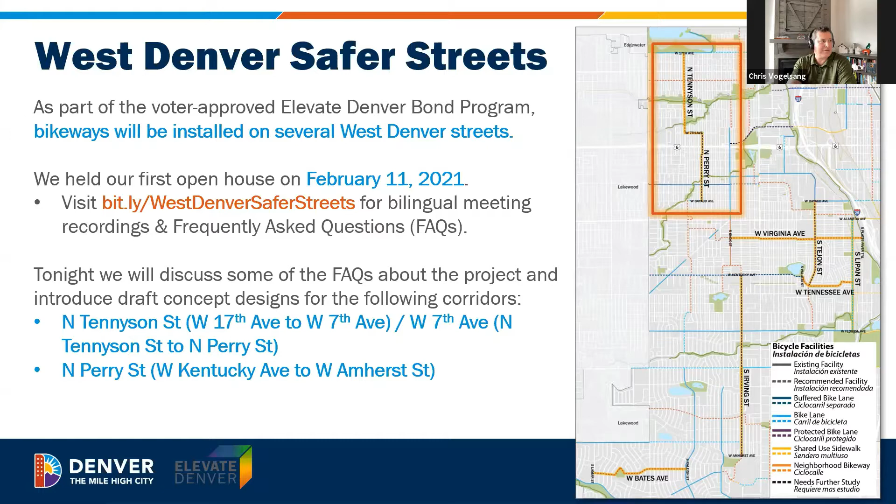We had an open house February 11th. I know some of you were able to attend, and we gave high level information at that point, but now we want to dig into the nitty gritty.

Our schedule for this effort: we had our first open house on February 11th to kick off the project. Since then, we've done a lot of gathering information and talking with schools and registered neighborhood organizations as much as possible, and gathering physical data to help us develop initial concept designs. Concept designs are how we put our ideas onto paper so people can see for themselves what is being proposed and give us good feedback.

After this meeting tonight, we'll have our input windows open for about 3 to 4 weeks, through mid-April, and we'll go through in detail how to give us specific feedback that I know is really important for everyone here. After that time, we would move a concept into design and then into implementation. Right now, our installation timeframe for what we decide on for our design would be in 2022 or 2023. So not that far down the road.

Which is very fast in DOTI's world, like next year.

To give you a sense of what we're going to talk about tonight, this is a high-level agenda. First, we'll do a quick poll question and give you the tools you need to see the concept designs for yourself and give us feedback — that's a very important part of tonight's meeting. Then we're going to go through the concept designs in 2 pieces: the North Perry Street piece, which is right now a protected bike lane type of installation, and then the Tennyson 7th piece, which is a neighborhood bikeway. Then we'll talk about next steps on how to stay engaged.

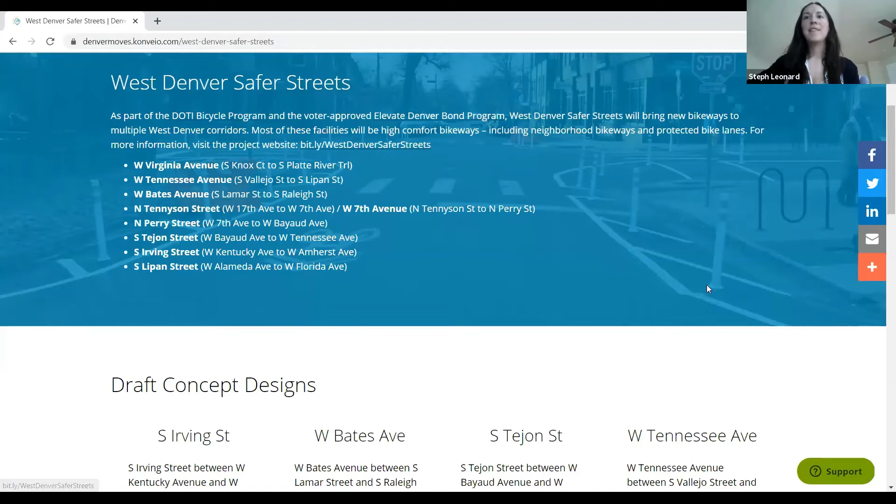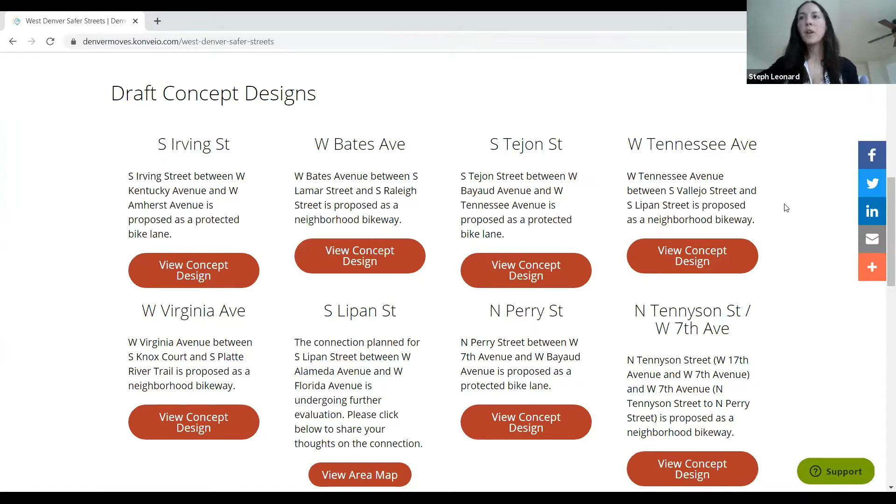We know what people are interested in, so we wanted to make sure the draft concept designs were up close towards the top of the page. I'll go ahead and keep scrolling through the page, and then we'll view a concept design as well. On this main landing page, we also have content from our first public meeting, which was on February 11th.

That was the kickoff meeting for the entire project, if you weren't able to attend. We have recordings in English and Spanish, as well as a frequently asked questions document that we are sharing in the chat.

I'll scroll back up and choose Perry Street. When you click on that, you get more content about the specific corridor. Perry Street is proposed as a protected bike lane.

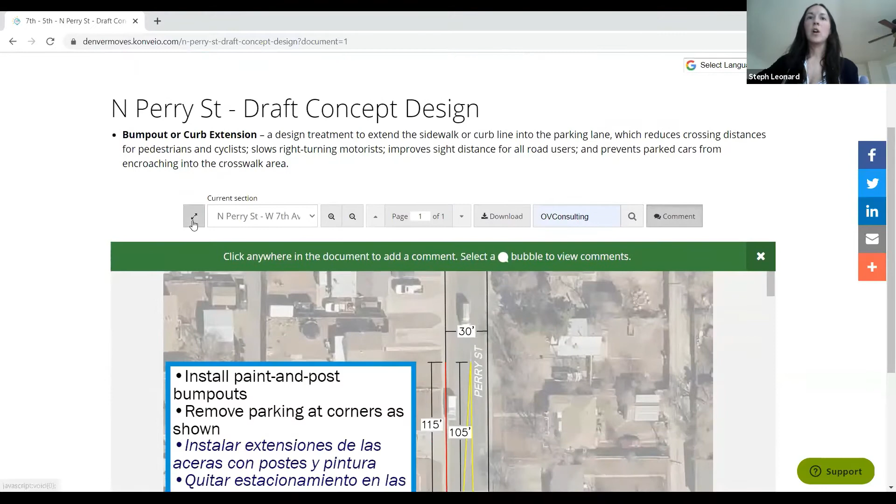We describe what a protected bike lane is, then go directly into the draft concept design, with instructions on how to use it. You can choose a language to interpret or have the page translated into, so if English isn't your preferred language, you can change that up here. If you're viewing from a mobile device, we've gotten feedback that it's a little hard to view the concept embedded in the page, so you can click View Draft Concept Design to see it larger, with a feature to expand it even wider.

That's if you're viewing from a mobile device—we recommend clicking this red button. I'll walk you through how the site is laid out. The corridors are rather long, so to improve viewing we've separated them into different sections so you can choose which one you're looking for. We cover everything, though sometimes references might seem a little off so we can call the closest cross street. Here we are on West 7th Avenue to West 5th Avenue, so you can choose between corridors here.

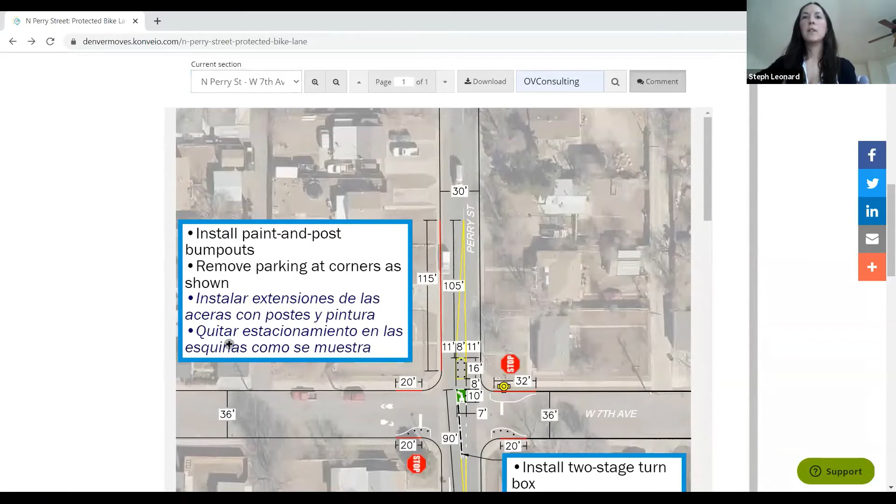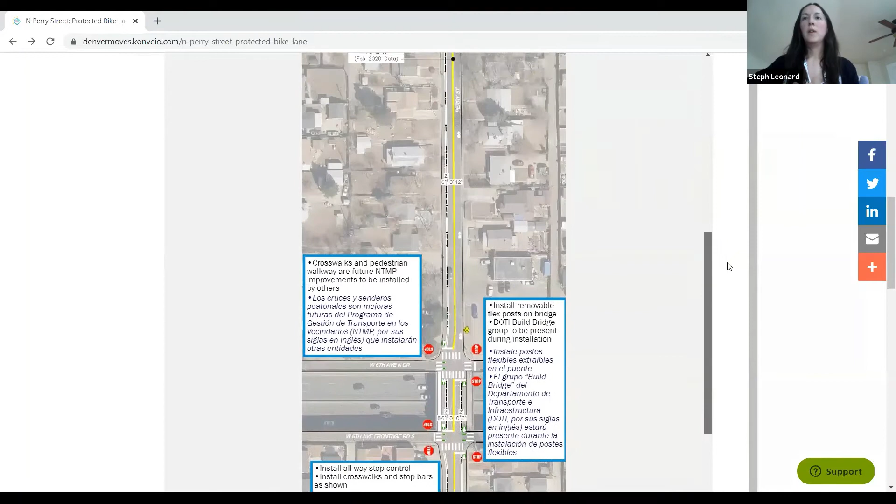Or you can scroll down and choose next to seamlessly move between different sections of the corridor. Right now it's zoomed in to cover the full area, but if you want a broader picture of how this segment will work, you can zoom out and see the flow of the corridor. We've translated all of the content into Spanish on our concepts.

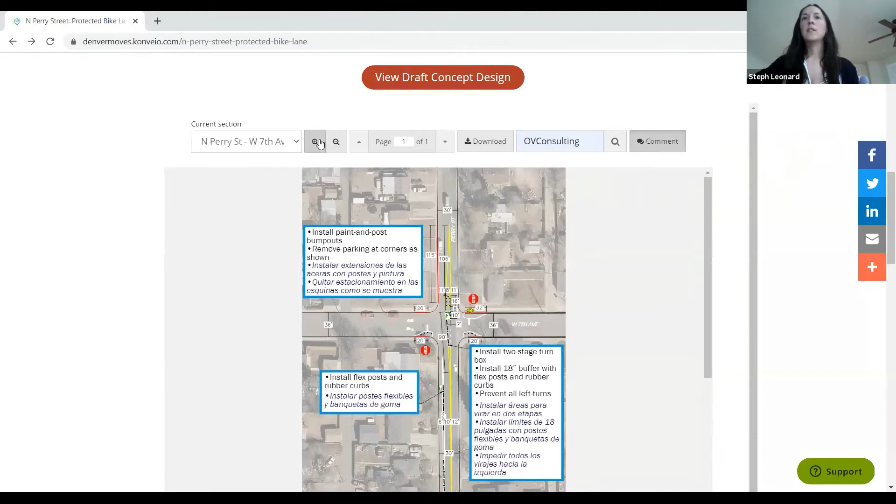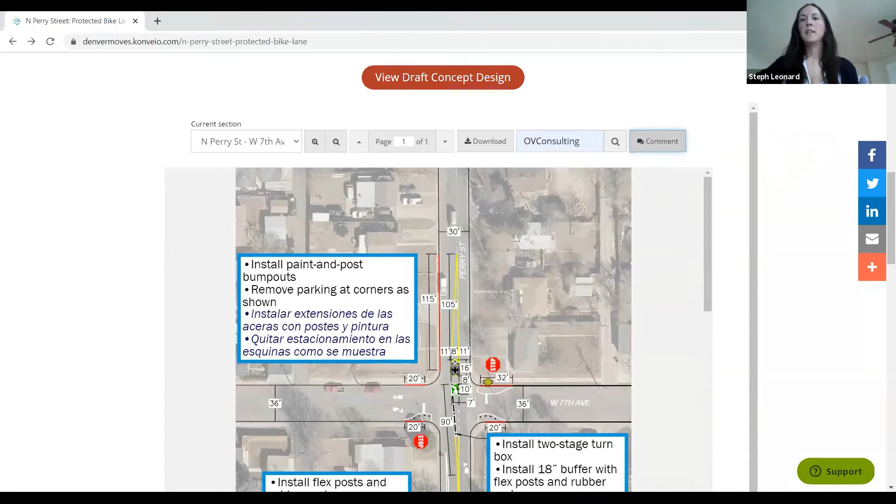The wonderful thing about this tool is it allows for open comment. You click on comment, then you'll get this little plus sign—say you want to comment on this median island here. This is the pop-up that shows up.

We recommend typing in your name so we know who the feedback is from. You can leave your email, though it's not required—email is especially helpful if you have a specific question, so we can follow up with you directly. Then you'll put your comment in, agree to the terms and conditions, and it helps us to know if you're classifying your comment as a suggestion or a question. Then you'll have to prove you're not a robot with the reCAPTCHA before you leave a comment.

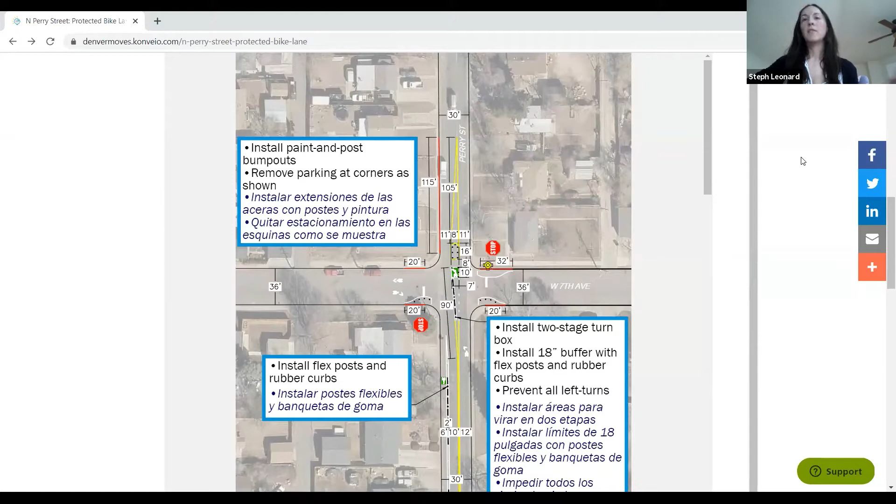What's nice is—and I'll show you on another corridor that already has more comments—this tool also allows you to view everyone else's comments and interact with other commenters. You can respond directly to comments that other community members have left, and there's also a like and dislike option.

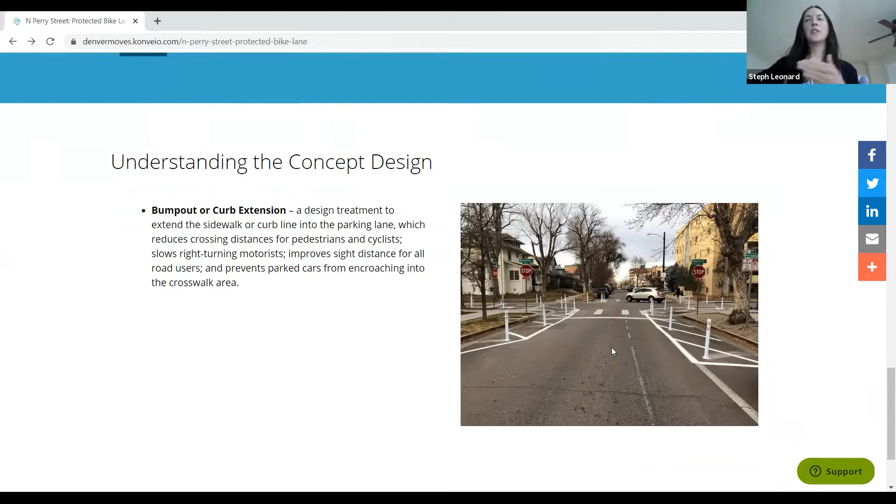Before I show you that, I want to finish out this page. If you have a general comment about the corridor—maybe about the entire span of the Perry Street corridor and not a specific section—we recommend you leave it here. We also tried to include a few design components so that when you're reading through the concept design, you can understand what that would actually look like. We've tailored them to the specific concept designs, but if something isn't showing up, the neighborhood bikeways tend to have even more features, so that's probably your best bet for finding that content.

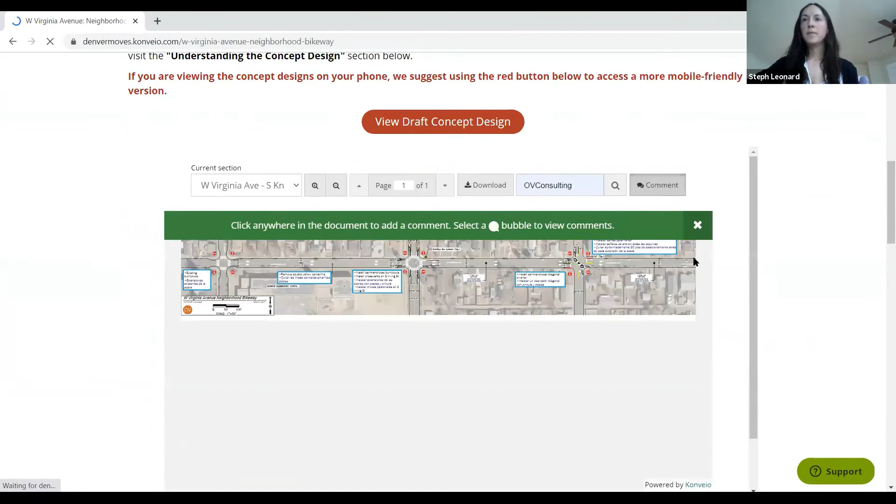I want to show you a nice feature. Say you wanted to leave comments on multiple corridors, you can just find this drop down here and switch between different ones. I'll choose a neighborhood bikeway that already has some comments on it—here's our Virginia concept design. Maybe there aren't comments on this yet, so we'll choose one I know has comments. Let's go to Irving.

Irving was our first meeting.

Takes just a second, especially with the Zoom going.

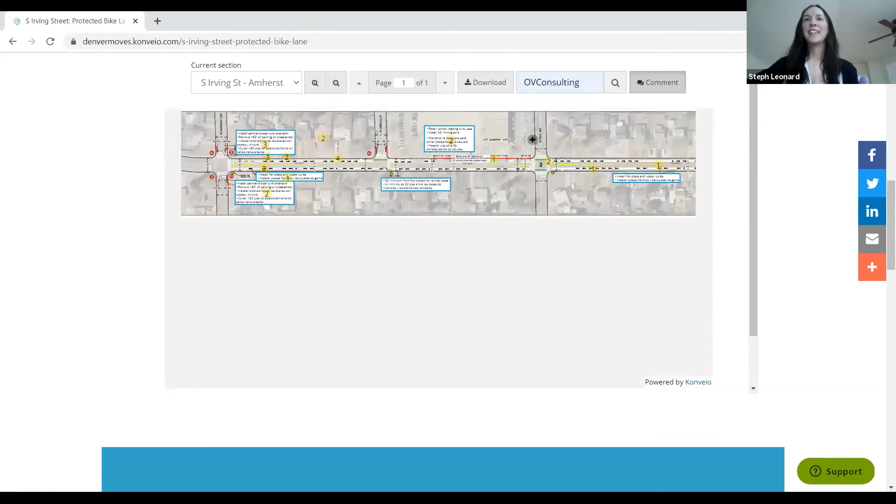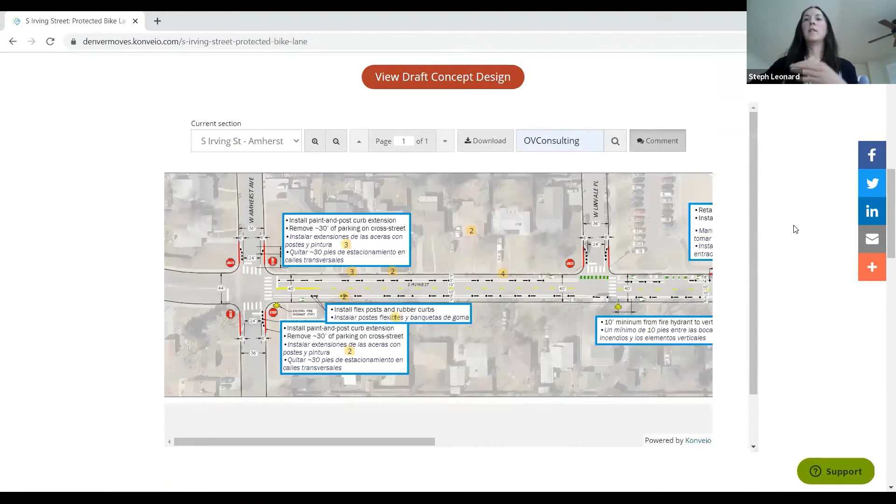So you see these new features. We have these yellow dots that show you all the different comments we've received so far. There's a general comment, and then people have liked and disliked, and then responded as well. That's nice so we can compare how different community members feel about the same thing. Maybe there's a lot of support for one particular comment, and we're hoping to provide an opportunity for more of a conversational approach, given that we are still in a virtual world.

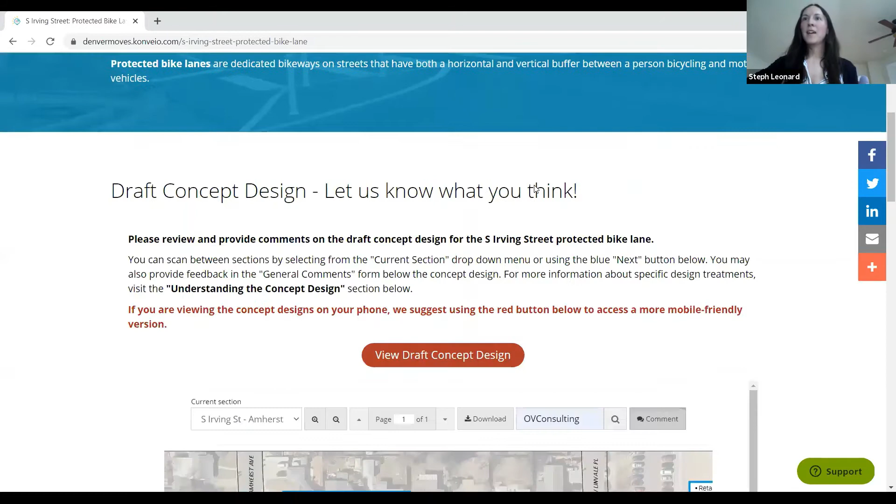All right, so I believe that's a good overview. I'm going to go ahead and stop sharing my screen. I imagine we've probably got some questions, which we'll answer in our upcoming Q&A.

Great, Steph. I know that seems like a lot of information, but we really want you to understand how to go there and how to leave a comment. We think that we can't stand around a map together right now and really dig in, and so this is the best option we have right now to sort of be able to stand around a virtual map and have a conversation. Appreciate you taking the time to explain that to us, Steph, and hope everybody has a chance to go check that out.

I am going to pass off to Geneva Hooten, the city project manager, to talk about some high-level items. Thanks, Chris, and thanks everyone for taking the time this evening to join us.

First, I just want to make sure, if you weren't able to join us last month at our first open house, that we're all on the same page understanding where some of these corridors came from. So 10 years ago, in 2011, the city completed its first citywide bike plan called Denver Moves Bicycles, which was then updated in 2015, and then these corridors were again selected in Blueprint Denver.

I will say that the Perry corridor itself used to run all the way through Perry, and then through a lot of community engagement and what we heard through the West area planning process, folks were really interested in looking at Tennyson, particularly because of the bridge over the Gulch, because it feels very different as a street. So that's why this particular alignment is Perry, and then it cuts through on 7th and goes north on Tennyson.

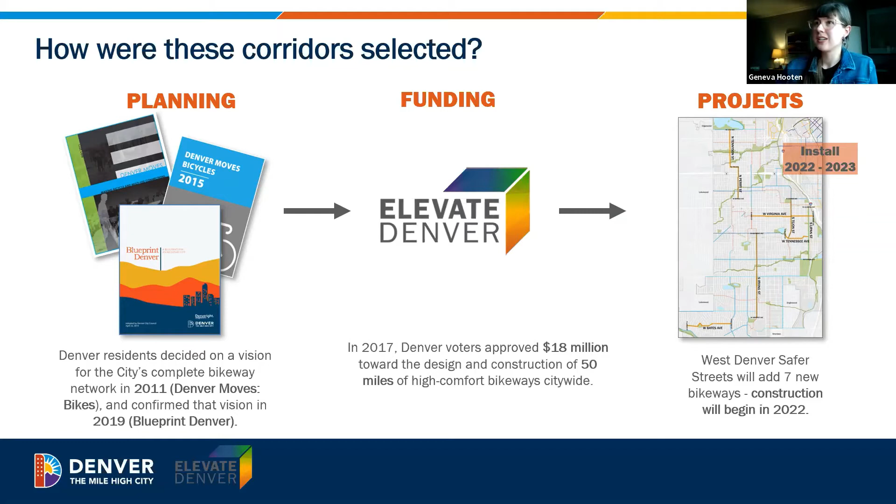Next slide, please. And kind of why we're here and why we're working on this is that throughout the city, it's our goal to move more people more safely and efficiently.

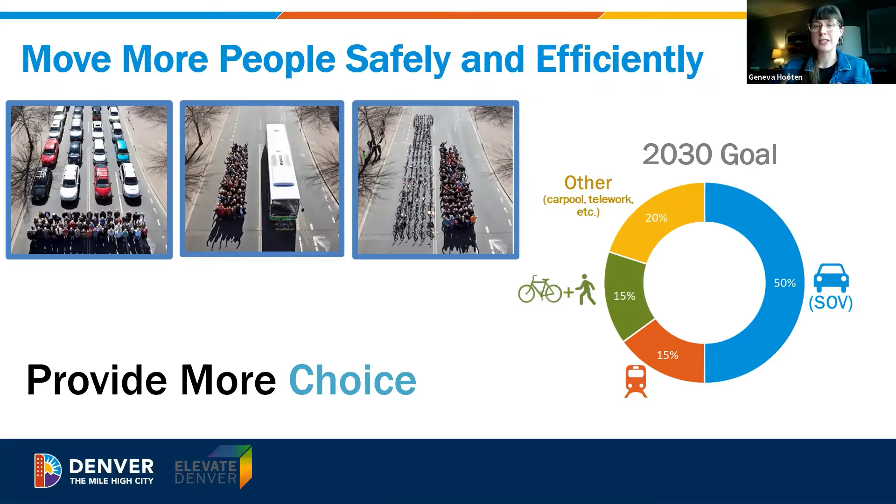Ultimately, we're trying to make it so that people have lots of other options to get around that aren't just relying on their own car. So that means walking, biking, accessing transit, which is really critical, particularly through here. We have an opportunity to provide more choices that are really comfortable and that can entice people out of their cars. The goal is that we can get there as soon as by 2030.

As part of that, we also understand that in order to really encourage different kinds of trips, for someone to say, you know, maybe I'm going to leave my car at home today and instead take my bike to the grocery store or to a coffee shop, or my kids can bike to school, we know that these kind of bike facilities have to be very, very comfortable.

So what you see on this graph is that you have some people who are going to ride no matter what—they're the light blue. And then you have some people who say, I'm never going to ride a bike, and that's okay—that's about 25%. But in the middle, we have about 59% of people who are really interested in riding but need a more comfortable experience to do that.

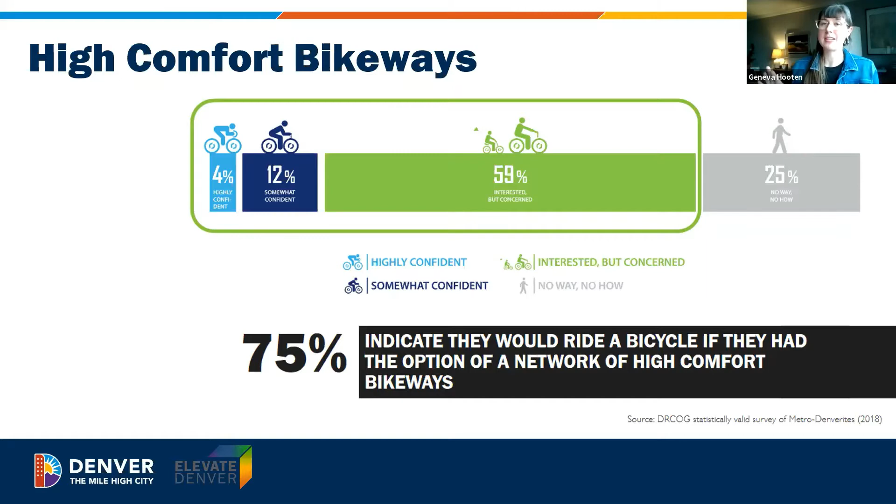We know that the way of creating a more comfortable, high-comfort bike facility is by providing protection on streets that have the highest speeds and volumes, and by really lowering speeds and volumes on streets that can hold that. So we're going to talk about Perry as a protected bike lane tonight, and then the Tennyson and 7th corridors as neighborhood bikeways.

Ultimately, one of the main goals we have as a city is to improve safety. Denver is a Vision Zero city, meaning that by 2030, only nine years away, it's our goal to eliminate all serious injuries and fatalities that happen on our streets. The number one way we can do that is by mitigating speeds. Speeds are the number one factor that will predict a crash, and also predict the severity of that crash. So as we lower speeds and create more high comfort bikeways, it will help us move more people in better ways and improve safety for those on our streets, whether driving, walking, biking, using mobility devices, or taking transit.

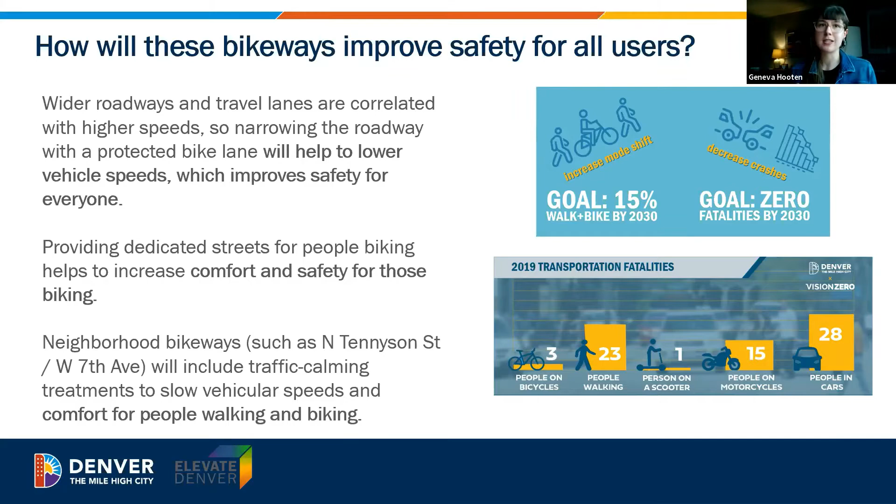For this Q&A, we want to focus on questions related to the high-level projects, as well as any questions remaining about the tool we just showed you. First, we had a question about the site I just showed, asking how to find the full corridor. We've uploaded the entire corridor concept, but the easiest way to view it is when the page first loads, you view through the first PDF and then choose next, so it's like you're seamlessly going through the corridor. That's just how we ended up cutting the segments.

We saw a couple questions about why 14th Avenue isn't being addressed at this time. That's noted as a neighborhood bikeway. Geneva, I'm hoping this question could go to you, and we could talk about the broader build out of Denver Moves Bikes and what that timeline looks like.

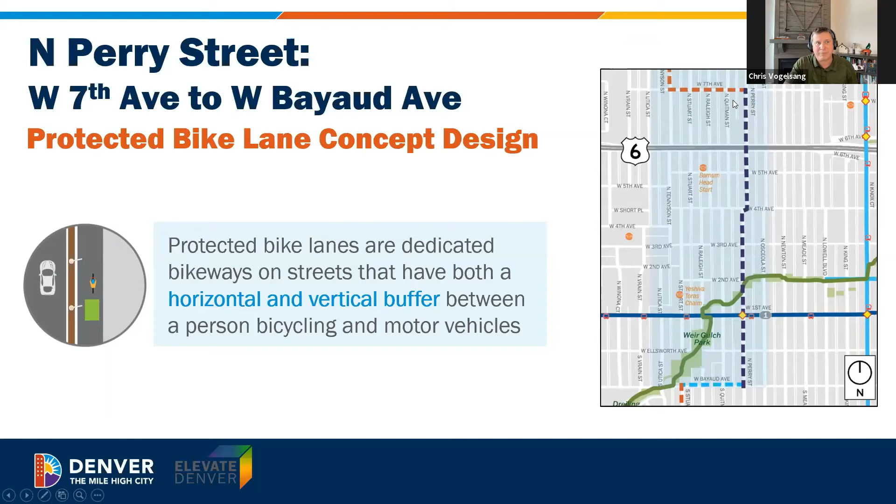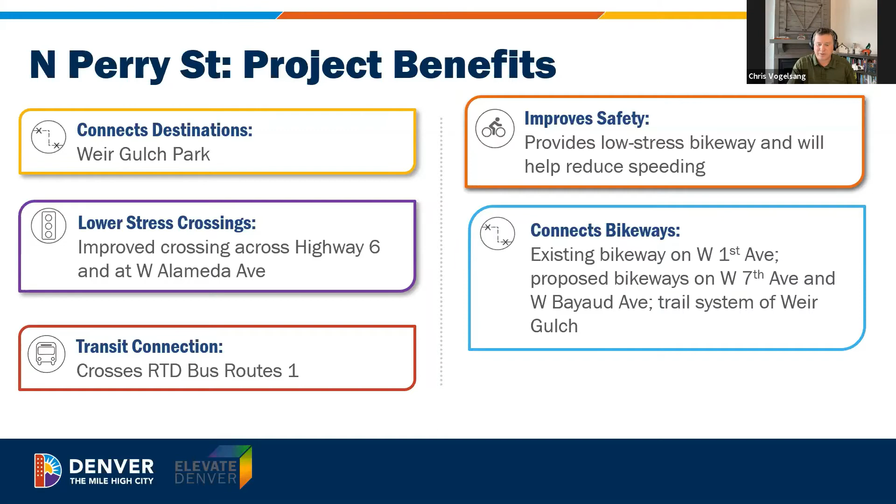So as we go through this, we think about what are the benefits of this project. What does it connect? This piece of Perry, and the Perry 7th Tennyson corridor really, connects eventually up to Sloan's Lake Park. It connects to the light rail system. It has Weir Gulch Park. We have to get across Highway 6 and West Alameda. And we have existing bikeways on 1st and 7th plus the trail system. So this is a pretty important north-south connection in this part of Denver, and that's one of the reasons why it's being looked at.

We went and collected a bunch of information, a bunch of data. This is highlights of some of that data we collected. We collected information on speeds, volumes, parking, crashes, and also physical characteristics.

The speeds on Perry vary depending on where you are, but they can be quite high, as high as 30 miles an hour for cars driving down Perry, and I'm sure you've all seen cars driving faster than that if you live on the corridor. The volumes are also on the high end, so we're at 4,000 to 6,000 vehicles a day. Our threshold, just to give you a sense, up on the top right here is a chart that's a good rule of thumb about how we try to select a facility. We have speed on the bottom, average speed of cars, and volume of cars per day, how many cars travel along Perry in this section.

This red dot indicates where those two data points lead us, kind of this very top right corner of this greenish area, which is buffered bike lane, protected bike lane interface there. Because of the crash history, which is significant in this part of Perry, with 6 bicycle crashes, 1 serious, and 6 pedestrian crashes, 1 serious, and 192 vehicle crashes, it can be a dangerous place to be if you live along the street. That's what pushed us from the buffered bike lane spot up to the protected bike lane to really get that safety element.

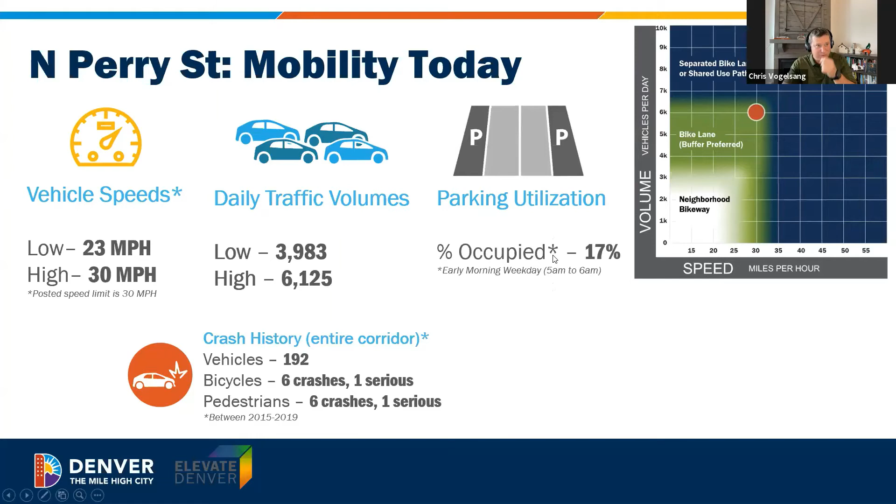That led us to conclude this should be a protected bike lane based on our engineering criteria, looking at speeds, volumes, and safety. So what does a protected bike lane look like on Perry Street?

This is what we call a typical cross section. It's as if you're standing in Perry Street looking north, say at First Avenue looking north. We have about 36 feet of total width to work with, from face of curb to face of curb, so it's not that wide to begin with.

The layout has a bike lane on either side of the street, one southbound and one northbound, with a buffered area—paint on the street with crosshatches—and a vertical element of posts and rubber curbs, which I'll show in a second. Then we'd have 2 travel lanes just like today, one southbound and one northbound, but narrowed up so they'd feel a lot narrower than today.

When you saw that parking occupancy data of 1 in 5 spaces full, what that means is in most places the street feels 36 feet wide, like 18 feet of travel lane, and that encourages people to drive more quickly. What we're trying to do is narrow the roadway to provide protected space for bicyclists and get the cars to go a little slower. This space is also useful at cross streets, which I'll show next, to provide safer pedestrian crossings.

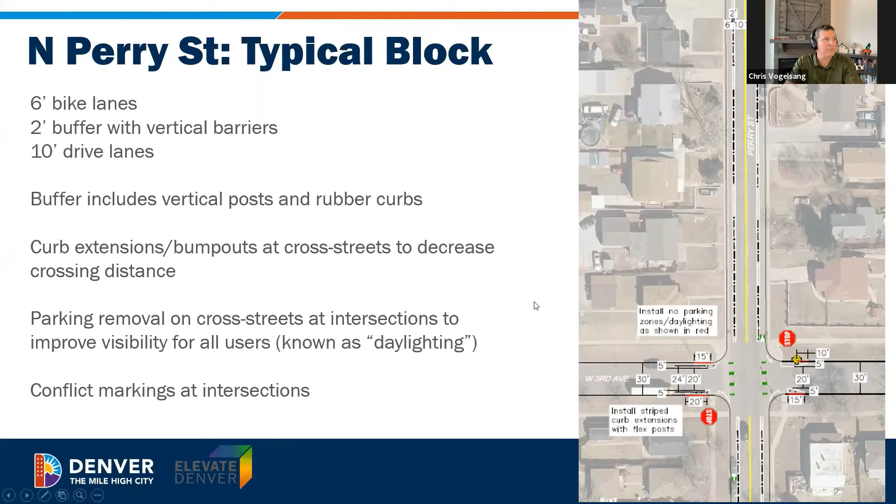Okay, I know a lot of people on the call have questions about parking, and so we thought we'd try to address or talk about some of that up front, and then we can talk about it more in the Q&A. So, why is parking being removed in this area?

This is an important corridor to make connections. We have high speeds and volumes, and that leads us to a protected bike lane being the safest facility. The speeds also lead us to the fact that additional pedestrian safety enhancements are needed. That's what I was showing you at those intersections, trying to get people to be protected and get the cars to go slower. Unfortunately, as I showed you in that cross section, there's only 36 feet of width available, and so you can't get everything in the same space.

So what we've shown now is we've laid that concept out, showing protected bike lanes in both directions, because that was the safest bike facility. Unfortunately, what that means is all the on-street parking along Perry itself would need to be removed. Now, the side streets are still available, and I know people say that's inconvenient to go to the sides, but just to point that out, we aren't trying to do anything to the side streets.

The other thing we get asked is about handicap and accessible spaces. So we've developed a design method where we could keep those spaces on the street in the location they are today and maintain that accessibility. It's sort of a trade-off, but those are important spaces to maintain. So if you have a space like that, it will stay. If you need one, or you think you need one, we're happy to help you apply for the permit and go through that process and point you in the right direction.

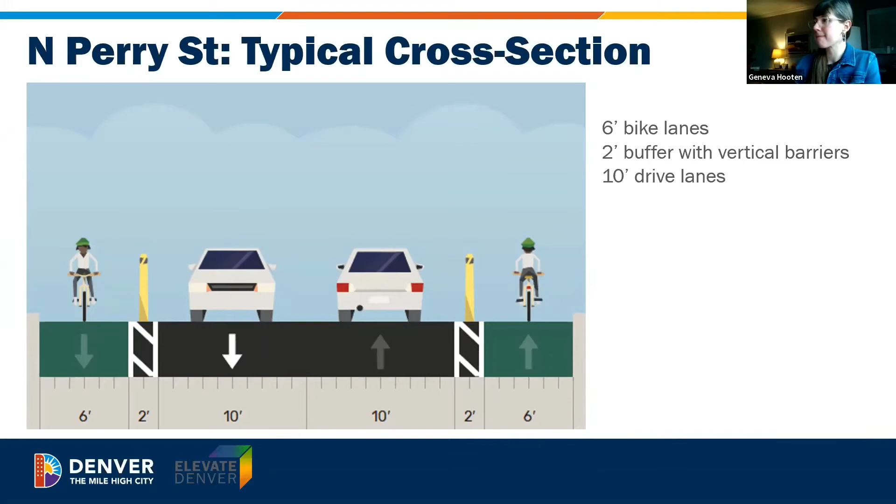Geneva, do you have anything to add to that? No, I think you covered it really well, Chris. Okay, great. Yeah, and I can't see your face, so thanks for jumping in.

Okay, Steph, let's take another one. Great, so we have a couple questions that were somewhat spot-specific along Perry, within the same theme of knowing that Perry has some changes in width as well as alignment, so there's an offset alignment here or there. The concept designs may cover how specifically we're dealing with these areas, but Chris, could you talk to generally how we approach varying widths, as well as what treatments we install or add to the concept?

Sure, so the varying widths - we measured each block, block by block, to see exactly how wide it is. Unfortunately, none of the blocks are wide enough to do a protected bike lane and have parking, so we get stuck in the same design no matter if it's 38 feet or 36 feet. We are sensitive to that width and trying to work with it as we go. If the street is a little wider, that means the buffer would be a little wider. We're trying to keep the travel lanes to 10 feet, and that's really important to get the speeds down and create that slower speed environment.

I think the other thing you were talking about is there are some unique situations on North Perry, especially at 4th, where we have that offset intersection - quite a few accidents there. It's very confusing: if you're going straight, it kind of looks like you're turning right, and people have to be careful with each other. As you look at the concept design, we didn't show that as the example right now, but when you get a chance to look, you'll see we've tried to make some improvements at that specific intersection to narrow it up, make the turning speed slower, and provide more clarity about how to use that space, to try to make it safer for everyone - not just bicyclists, but pedestrians and autos as well. We'd love your comments on that. Please take a look and leave us a comment and let us know if you think that's adequate or needs to be different. That's a place we paid special attention to.

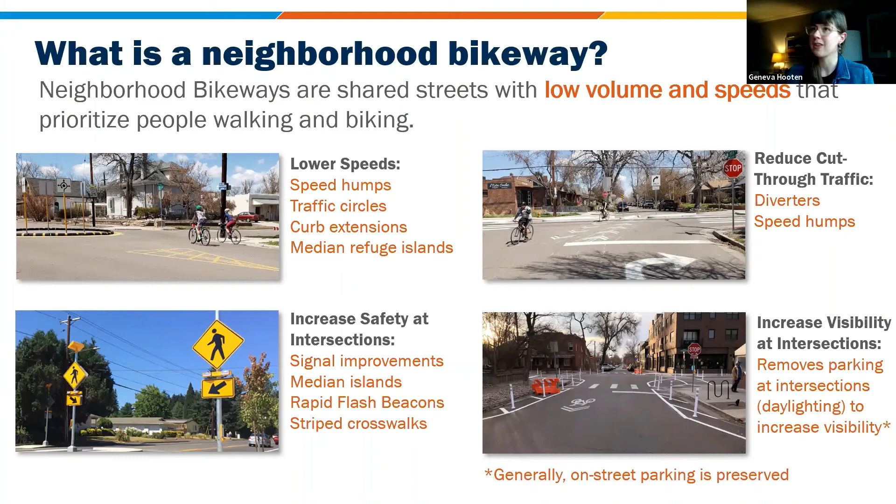So this corridor, as we've talked about a little bit, came from the community through the West area planning process. A number of folks said, really take a look at Tennyson, we think that's a really good street. And so we went out and we did some data collection, and we agree.

We think that Tennyson corridor does provide a great north-south option to connect people from Sloan's Lake across Colfax, where it is signalized, connects to an elementary school at Colfax Elementary. It also has the bridge over the park and over the gulch, and so you can use that, you can get to light rail, and then it brings you down, it connects to Martinez Park and to another trail, and then uses 7th to get to Perry.

And Perry, one of the critical reasons why we're using the Perry alignment is because it has the crossing over 6th Avenue. So we know that that's where a bunch of people are funneling in to cross.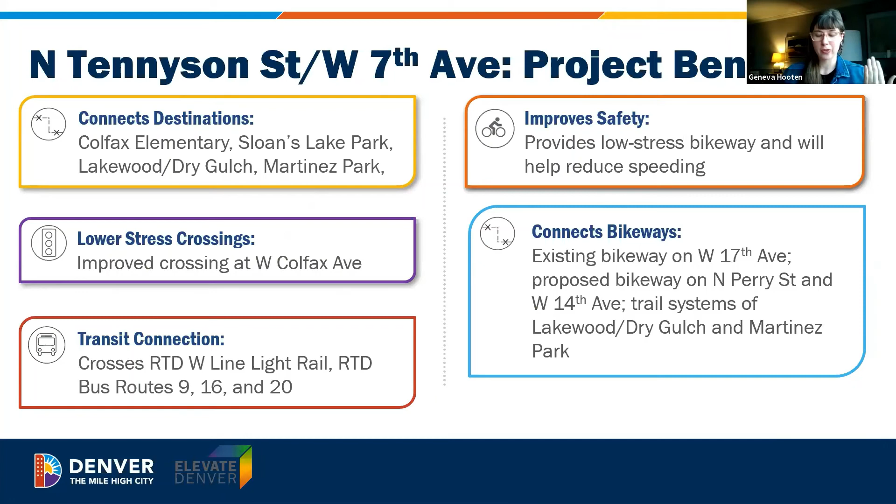It also provides transit connection, both on 17th Avenue, certainly to the light rail, and to transit on Colfax, as well as other places. Yeah, you can go to the next slide, Chris, thanks.

And what does the street look like today? The speeds that we're seeing are between 26 and 29 miles per hour, which is higher than what we want to see for a neighborhood bikeway, but the volumes are much lower. So we're seeing volumes that are as low as 189 cars a day, which is fantastic, and as high as about 1,500. So this for us is in the right realm.

It's easy enough to really prioritize people walking and biking on this kind of street. We don't have to do any kind of major diversion or make any really grand changes. It's just sort of turning the dial a bit, improving the street, mitigating speeds as much as we can, and hopefully then prioritizing people who are walking and biking.

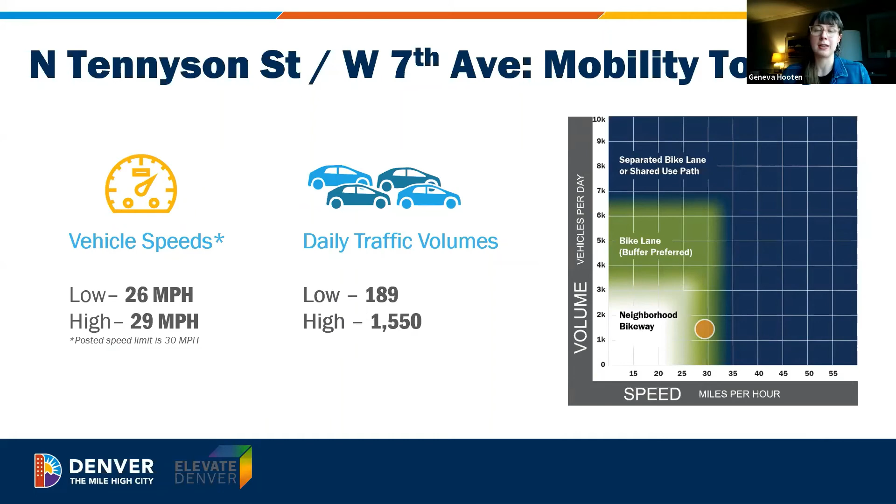So here is one thing that we would like some feedback on. We had the alignment going straight on Tennyson between 16th and 17th to the park, but we've also heard from others that say, to actually get to Sloan's Lake, there is an all-way stop currently at Utica and 17th, which is also one of the main access points to get into the park. So maybe it would make more sense to go to Tennyson and then have people take a left-hand turn and then a quick right-hand turn.

So here is one option that we have outlined for what that might look like, but we really do want some feedback on this between Tennyson and Utica, if there is a particular alignment that you think makes more sense and maybe would be more intuitive to you as well.

And I will say that on all of the corridors that we will be installing, we will be adding wayfinding to help people get around. So if you're on a street or you're trying to get somewhere, you can use the existing bike network to help yourself navigate. So let's say you're on Tennyson, the wayfinding would direct you on 16th north to the park.

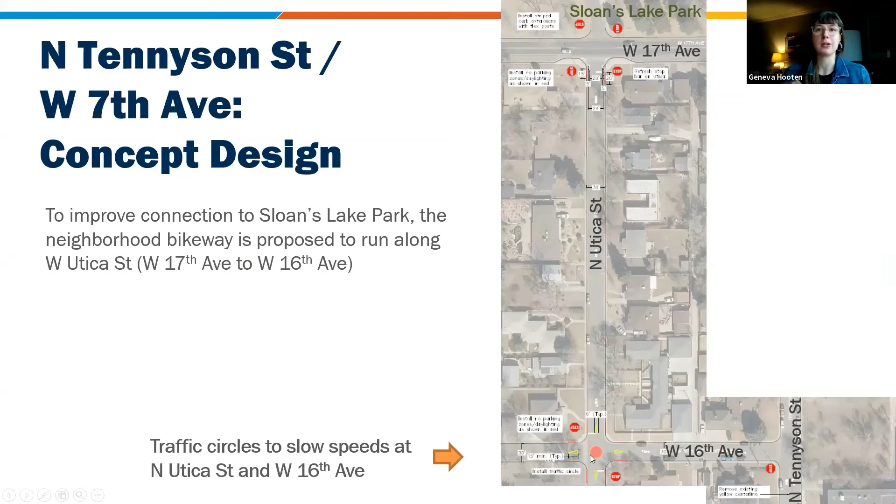And I'll just point out really quickly that one of the options that we have is a traffic circle at 16th and Utica to kind of slow down any turning movements. And then there's already a stop control at 17th. Okay, next slide, please.

So a couple of other things we want to talk about with this corridor: we have in the design a few speed cushions, which we hope will slow down speeds mid-block, particularly in those few blocks just south of Colfax, where the blocks are pretty long and it can be easier for people to pick up speed on longer blocks.

In addition, we have a few median refuge islands on the left-hand side. What this does is add a little bit of friction on the street, so you can still drive and bike across it, but you tend to slow down a little bit more. That treatment makes a lot of sense next to a school in particular.

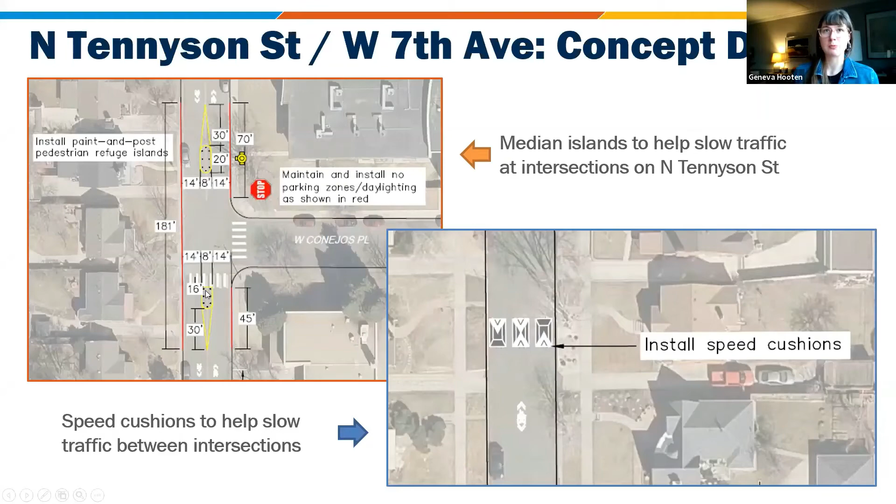Next slide, please. So here is where we're showing the one block that is really, really steep, and a couple of folks in the chat panel have talked about this as well. Between 10th Avenue and 9th Avenue, Tennyson is a steep, steep street.

You can see we have some curb extensions going on at 10th and Tennyson to help slow down traffic. One of the things we heard when talking to a registered neighborhood organization was folks saying that hill is really tough for me, and I would feel more comfortable if that were striped out as a bike lane. This is a fairly common treatment on streets with lower volume, where we can have a sharrow in one direction and a climbing lane in the other.

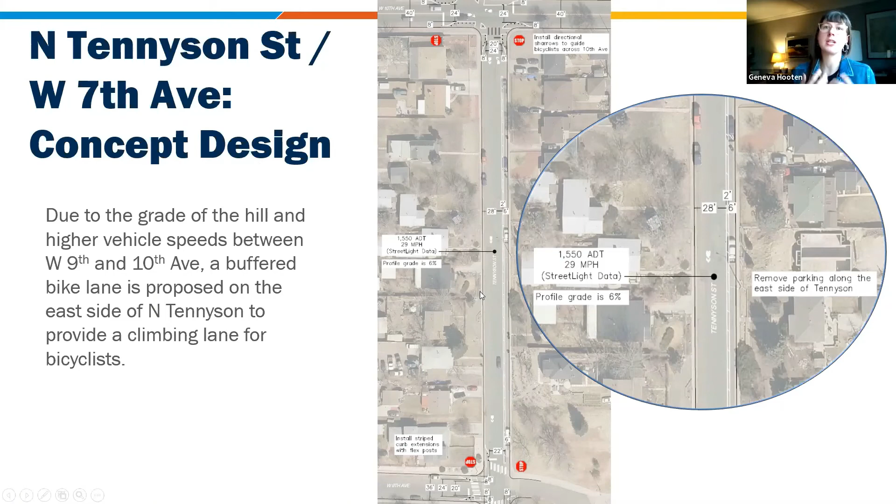So for this street alone, we're showing that there would be a half parking removal here to accommodate a climbing lane, but we wouldn't be touching the parking on the other side. This was based on community feedback saying, in order for me to feel more comfortable on the street, we really would like to have a climbing lane.

Next slide, please. So at 7th, Tennyson comes down and then it turns. In between Tennyson and Perry is where we have several different traffic calming treatments, including traffic circles and curb extensions. Here you can see on the left-hand side of the screen a curb extension, and the intention here is that it's going to shorten some crossing distance.

There are already existing valley gutters on the street, which actually provide almost a natural traffic calming, because most drivers tend to slow down a little bit when you reach those. So we have traffic calming already built into the street, and then we'll be adding curb extensions and traffic circles. The intention here on 7th Avenue is really to slow down traffic as much as we can to increase safety, particularly for people who want to access the parks and trails and get there feeling really comfortable.

And at 7th and Perry, for this particular intersection, we were trying to figure out a good way to transition people from one to the other. If you're going northbound, you need to take a left-hand turn; if you're going eastbound to southbound, you need to take a right-hand turn. So what we were trying to do here is facilitate that turning movement with greater comfort, particularly concerning the volumes of traffic we have on Perry.

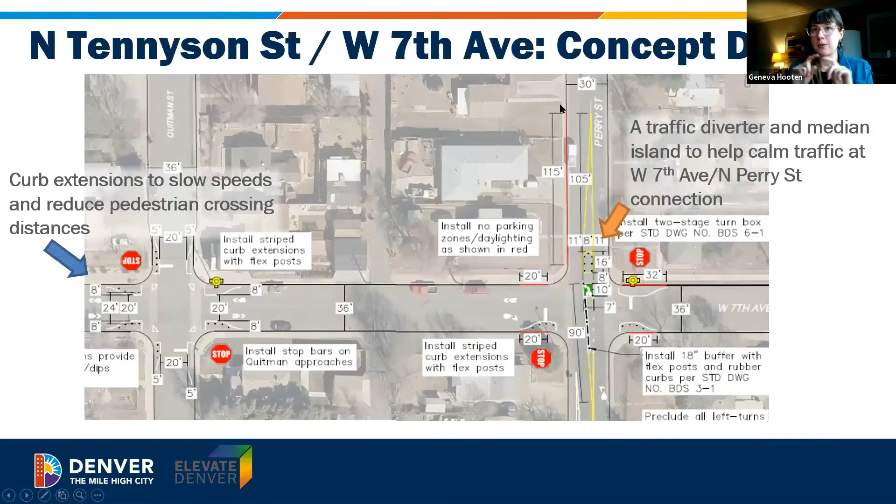Thanks for explaining wayfinding for us, Geneva. I did have one, this one's a little more general, but I think it will be important for everyone to know. We had a question about how we are using community feedback and how it's being taken into account in the process we're walking through. Yeah, just ways that we can also hear more from residents in the area.

Yeah, definitely. So this evening, seeing the chat is really helpful, and I think there's a lot of good input. Through the next month or so is when we're going to be collecting a lot of this input, both from things like this evening and other office hours and phone calls. We're logging all of that and really tracking what we're hearing. In particular, I want to emphasize that adding comments online onto the input tool will be a huge way for our team to use that. Because it's so geographically specific, it's helpful. So that's a great way for us to get that input. Then we're going to collect it all, review it, and see if there are some things that need changing.